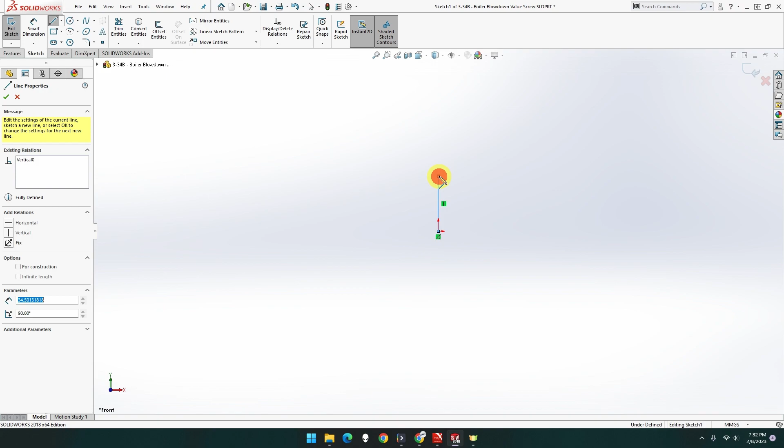Alright, might do something similar to the last one. Instead of doing cylinders, we'll do a profile of it and revolve it. So front, sketch, start with a line. It's going to start here. It's going to go up, across, down, across, angle, down, and across. That's basic. Basic

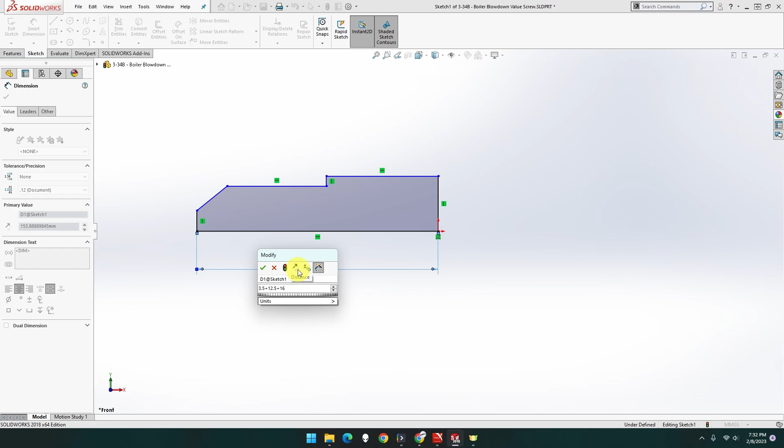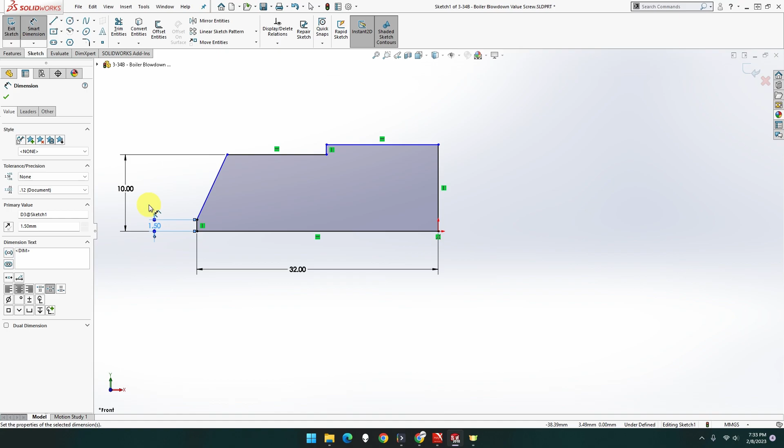shape. So we've got 3.5 plus 12.5 plus 16. Missed a 6. Oh, no, I didn't. So it's going to be 32. This to this is going to be 10. This one's going to be... Oh, no, not 10, sorry. It's going to be 1.5, that was 3. But it's going to be 5, sorry. I remember I got half the measurements.

Going that way. Going this way, it's going to be normal measurements. So this point to this point will be 3.5. That's for the first measurement I got for length. This one's going to be 12.5, second measurement I got from the length. And 16. Oh. Yeah, because they were okay. 16, yes. Because that's already there. I'll put that in there, just main reference, so that's cool. So we've got, that's going to be 6. And that's locked everything in place.

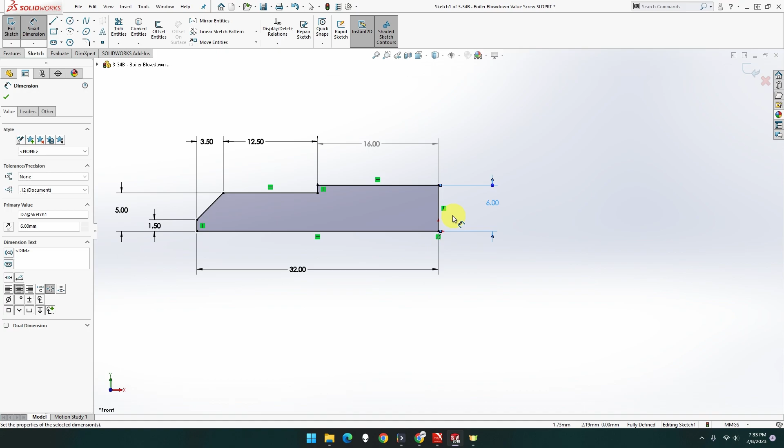So that's actually 12. Now, at the end, there's going to be a cube, which I'm doing that because you can't revolve a cube. Not that I know of. Okay, so let's revolve. Got all that around that one. And done. There we go. Yep, that's good.

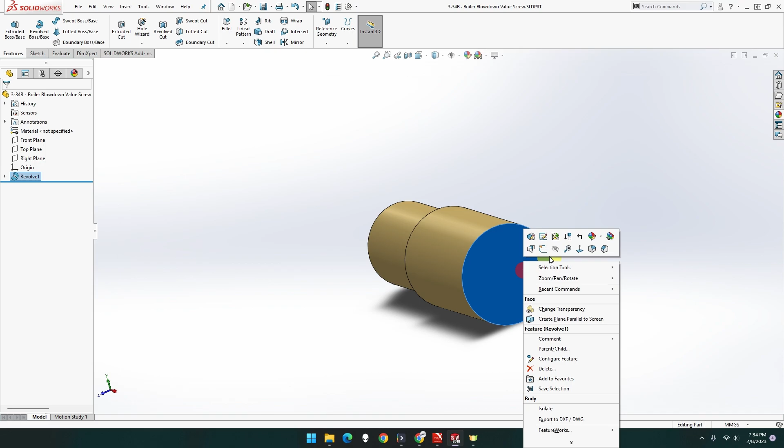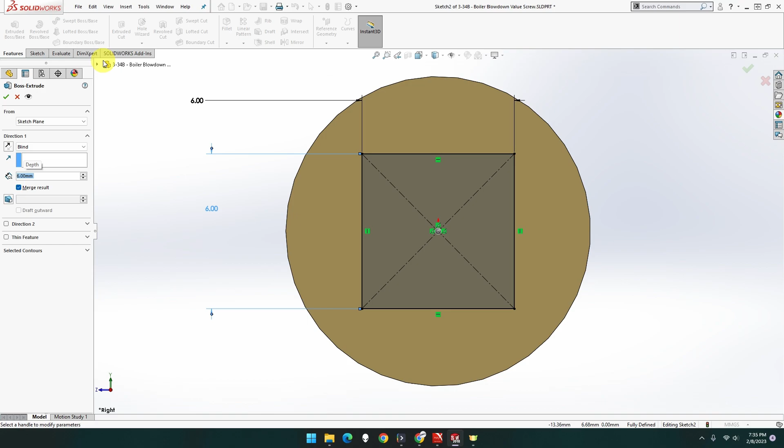Okay, let's end here. Let's go to normal to, sketch, square, from the middle. It's going to be smart dimension of 6 by 6. 6. And 6. It's going to be extruded by 6. And done. There we go. That's looking good. Oh, there's no measurement there. That was a wild guess.

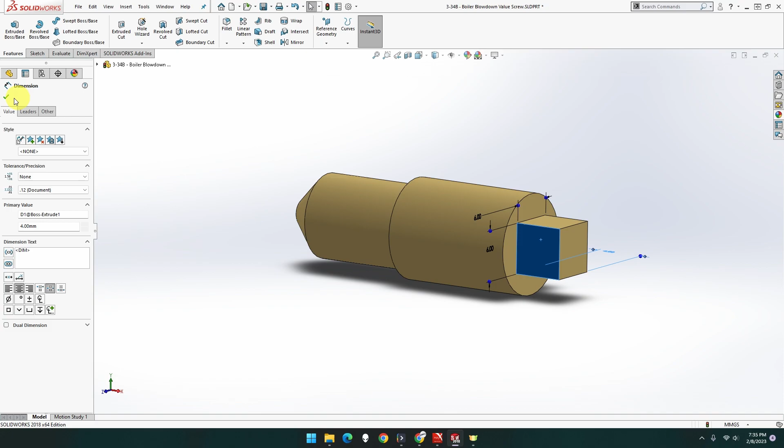So I'm going to pull that one out. Let's put that one 4, see what it looks like. And done. And rebuild. There we go. Looks better. Okay, yeah, 4 looks good. Yeah, I didn't think it's 6, I thought maybe 5.

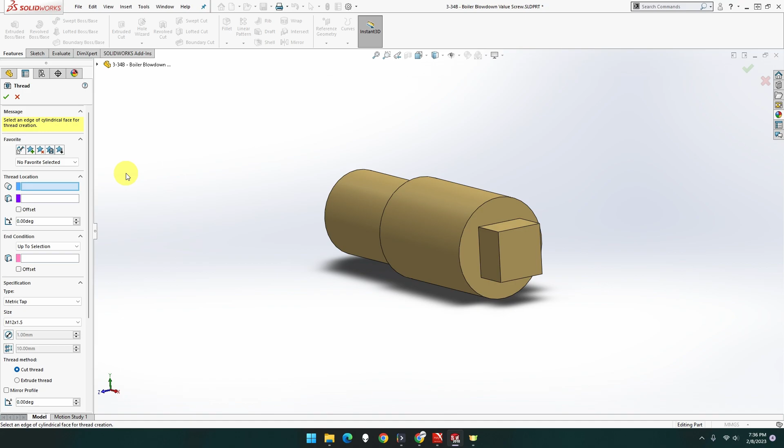Okay, now this here is going to have a thread of 12. So let's go to thread. Let's see. 14 was the last one we used. Scroll up. 12 by 1.5. Then we're going to have from that one to that one. Swap it over. Where is it? Extrude thread. And that's the full length.

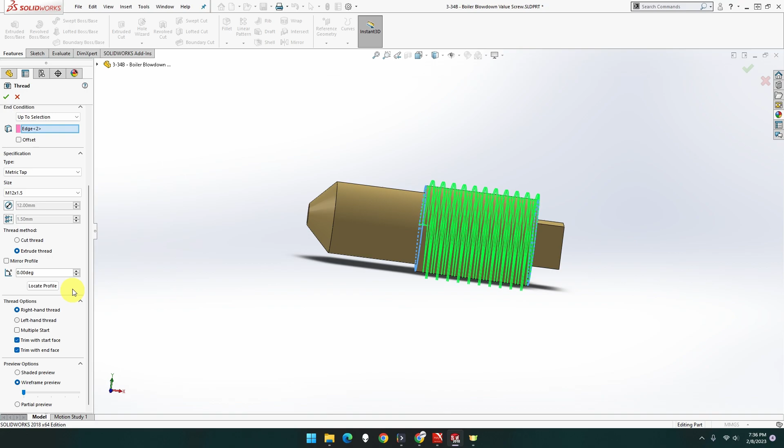I'm going to try something. Just trim those edges. This one here, if I click on that edge, why does it go? Oh, it stops there for some reason. That's interesting. Oh, hold on. So if I do that edge there, this edge there, yeah, no, still. That didn't work.

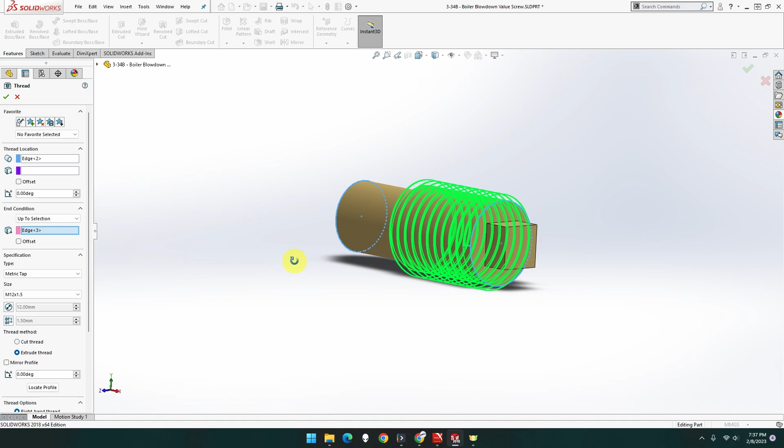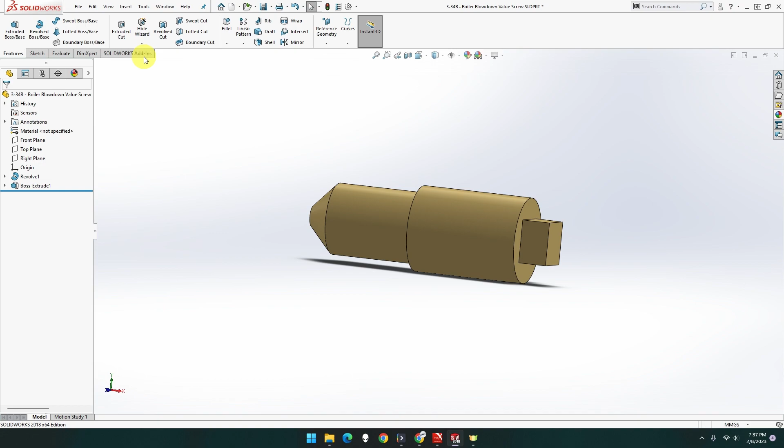Okay, let's swap them around. So that edge there is going to be there, and this edge here is going to be there. And okay, looks smaller for some reason. Okay, I've stuffed something up there. Let me cancel that. Let's go thread again. Missed thread. Yeah, I thought maybe if I had it go across, but it's going that way, so that's fine.

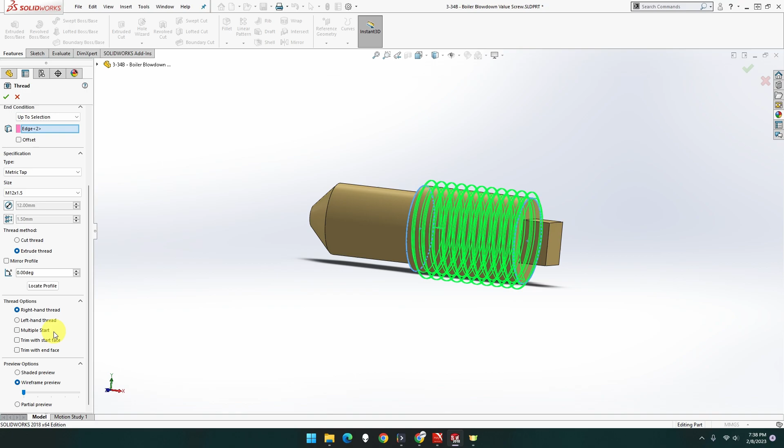Let's go to that one there. Up to selection. That one. It's going to go to extrude. I missed. And trim both ends, and okay. There we go. That works. That works pretty good.

Okay, we could do a brush steel. There we go. I think it's brush metal steel or something it stands for. I could be wrong on that, so if I am, let me know. That's that part done. So that's part 3-34B, the Boiler Blowdown Valve Screw, done.